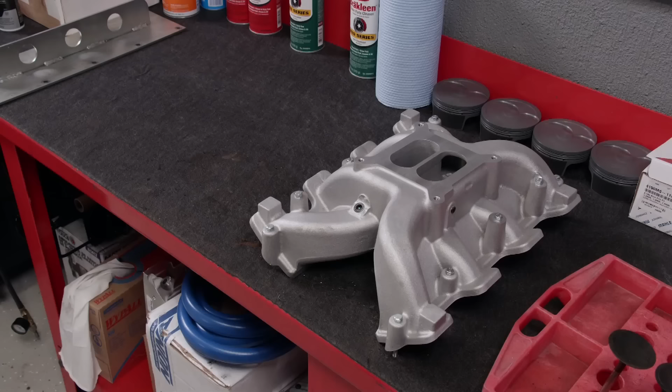Now there's a lot of parts that are available for it, and it's easy to get running out of the box. One question we always get asked is, why don't you dyno the engine with some of the stock parts on it? Well, that's a good point. So today we're going to get this engine running with the minimal amount of parts we have to get it on the dyno. The easiest and cheapest way to get this bullet making steam is to carburate it, so we'll start there.

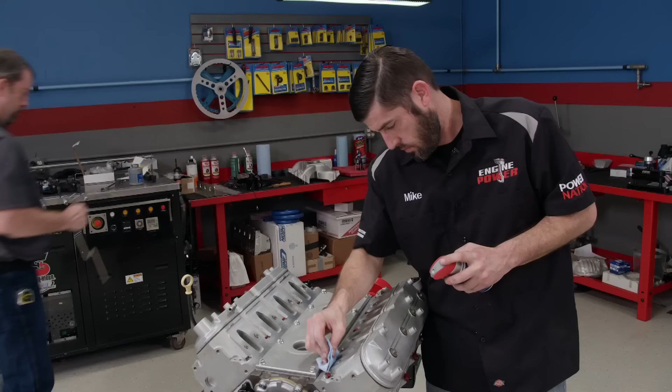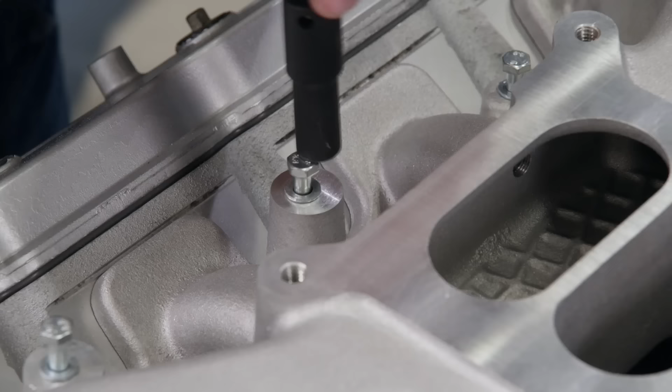WD-40 is used around the intake port so the O-rings in the manifold seal properly. Doing this dry can damage the seals. This is Holley's dual plane manifold for LS1, 2, and 6 engines, which have a cathedral style port. The stock cam sensor is installed, followed by the crankshaft sensor. Next, the OEM coil pack setups go on. This is typically what you would get with a donor engine.

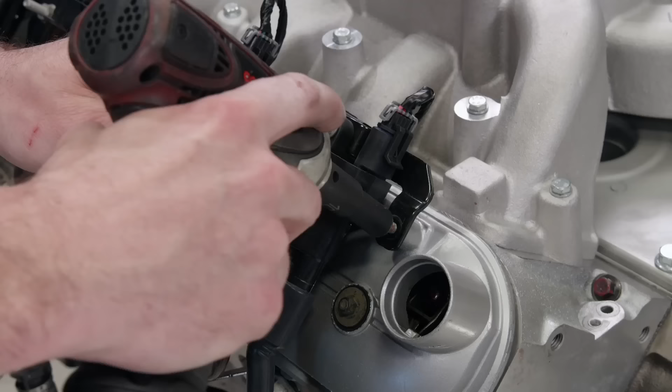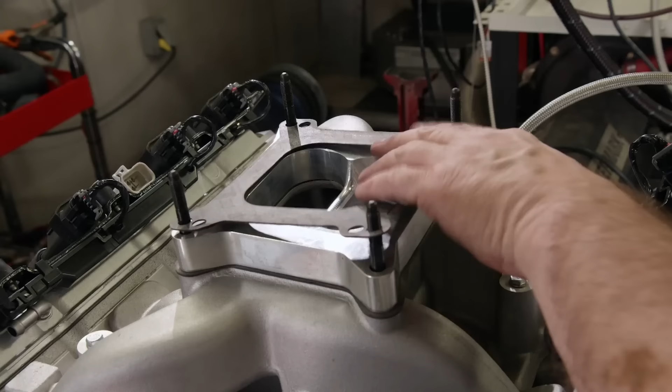With the engine on the dyno stand, it's rolling into the chamber. We'll run it with a 1-inch carb spacer and a trusty little 650 CFM Classic HP from Holley. All right, we're starting this up. We're going to be running it on 93 octane pump gas, and the timing is going to be conservative, 24 degrees total, because we don't know really what's going to happen. So it's going to be run from 3,000 to 6,000 RPM on the pull. Ready? I was born ready.

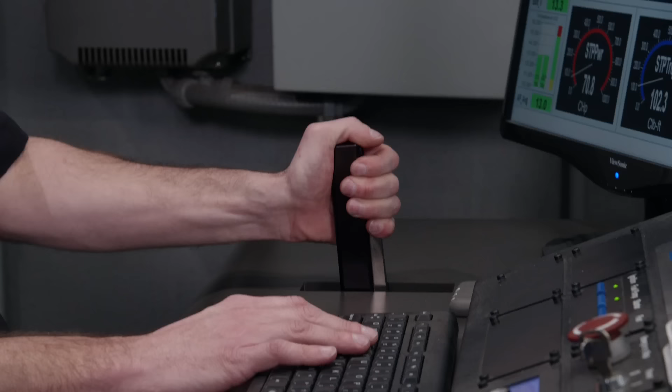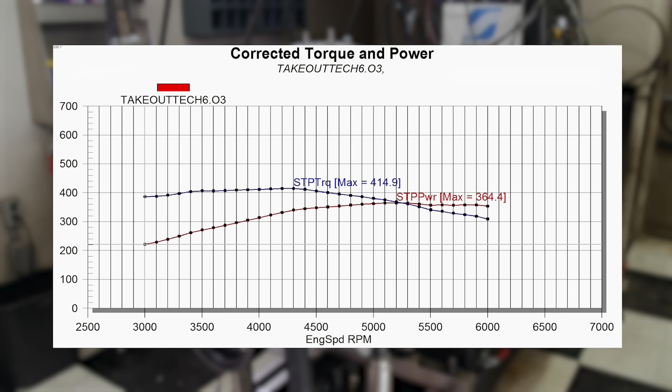That was very smooth, very clean. This thing does have a restriction. A ton of manifold vacuum. Let's go jam that 950 on there. There's a little boost in power. 414 pound-feet of torque, 364 horse. This is literally a donor bone stock LQ4 takeout that we did the absolute minimum. If you were going to put it in a hot rod or something, we stuffed a carburetor on it, a standalone ignition system. And it makes respectable numbers.

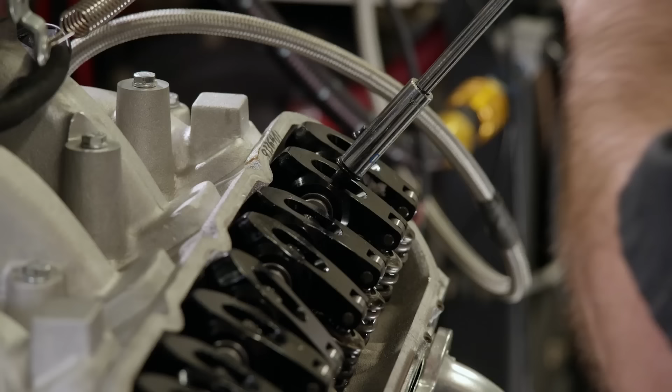The factory rockers do have a needle-bearing fulcrum, but not a roller tip. They are a 1.7 ratio, just like what we're putting on. These Summit rocker arms use their own pedestal stands and alignment bars. They have a full roller tip, and this design will improve the rocker's geometry. So we shall see some decent results. That was a nice looking rocker for the price too. Yeah, it's a Summit rocker, Summit brand. Nice little piece. Everything's the same, timing, whole 9 yards.

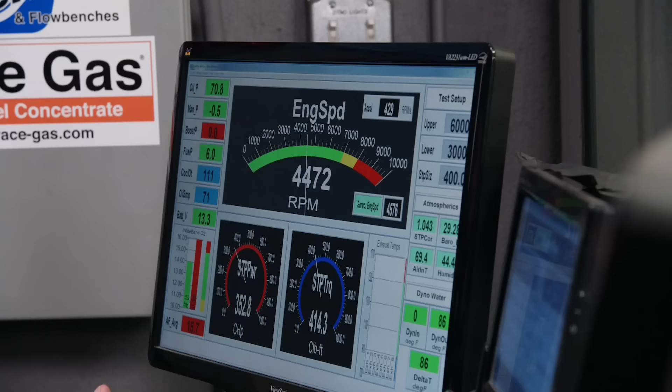Give her the raspberries here. Here we go. Wow. How about them apples? Not too bad. 375 horse, 419 pound-feet. Yeah, that's 9 horse. Nine horse from actually about 20 minutes work.

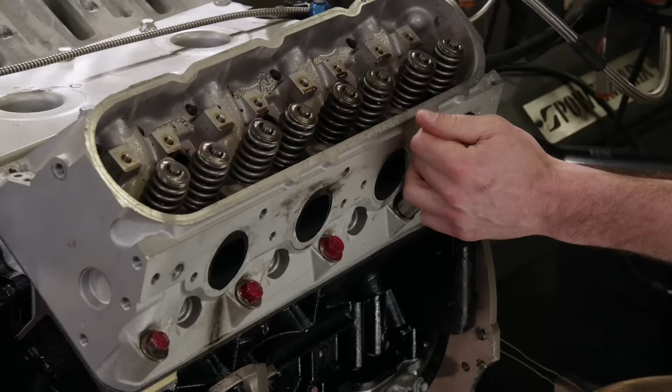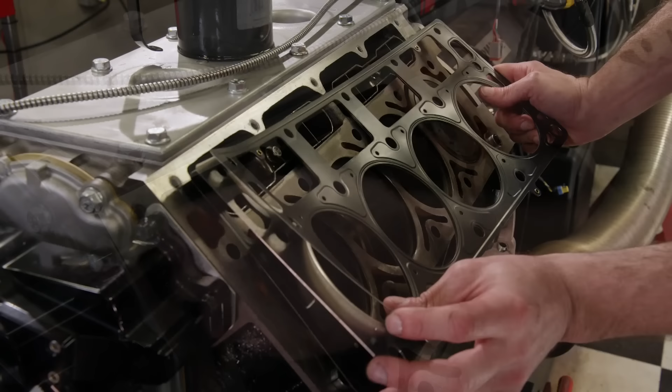Yeah. The stock heads come off along with a 51 thousandths composite head gasket. Since the heads are off, new Trick Flow lifters will go back in the stock trays. Cometic MLS steel head gaskets with a 36 thousandths compressed thickness are placed on the decks. That makes way for one of our favorite bolt-ons, the cylinder heads. Try 3,500 to 6,500. So.

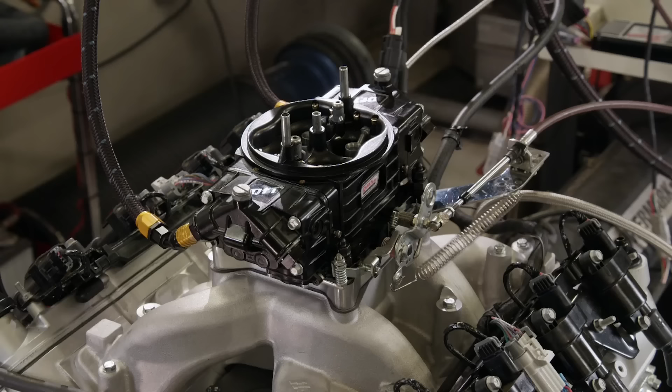416 horse, 440 pound-feet of torque. That's literally with a stock cam, which is a little baby cam. Oh, yeah. So now you know what the next step is. Camshaft. Cam Motion has been making horsepower for 40 years. They're always on the cutting edge of lobe design for street cars all the way up to full-blown race applications.

All right, the only thing we have swapped out is the cam and the timing set, so everything else being the same, we should see a significant increase in power with this. This is gonna be good.

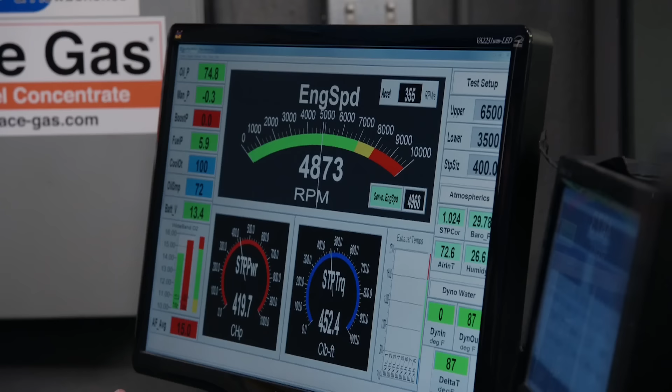That did exactly what it was supposed to do right there. Wow. 511 horse, 454 pound-feet of torque. That is absolutely incredible. This is actually pretty incredible, and as far as engine building is concerned, with just literally bolting stuff on, anybody can do this. Yep. Up next, we've got the real horsepower recipe for the working man's bullet. There you go.

When it comes down to it, we're normal gearheads just like all of you. Now in the shop today, we're going to be assembling an engine that you've either heard or seen a lot about. The 6-liter LS truck short block, known as the LQ4, has proven itself time and time again. These short blocks can be purchased as takeouts for a little less than $1,000 with plenty of life left in them. Or you can find them remanned or in basically new form for a little under $2,000. But either way you go, you have a great platform for reliability and impressive power.

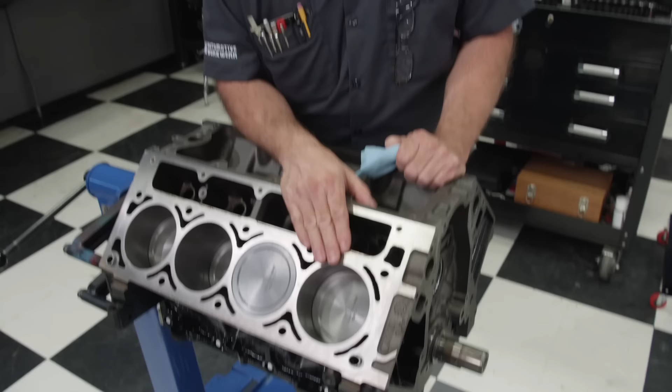The recipe for that impressive power statement Pat mentioned is fairly easy to come up with. We have a stout bottom end from the factory that is ready for a killer induction package. This 6-liter has a 4-inch bore and a 3.622 stroke, which comes out to 364 cubic inches. Now in factory trim, they were rated at 300 horsepower and 360 pound-feet of torque. We're using that reman short block so we don't have to touch the rotating assembly.

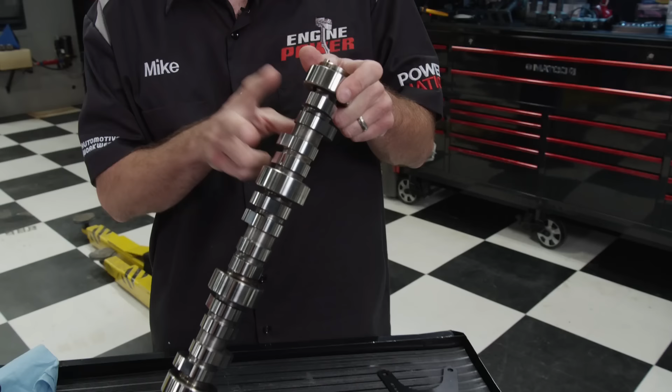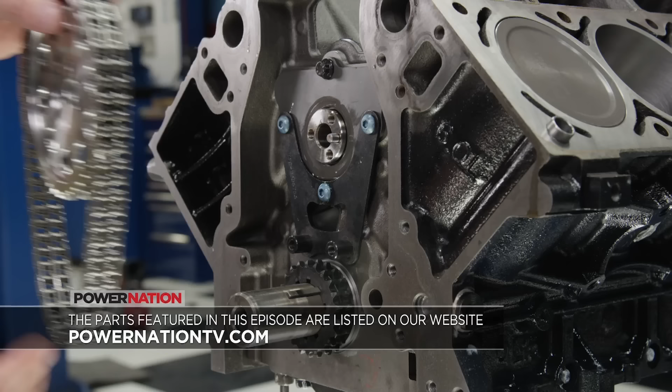Now we're going to start off with the camshaft, which is the brain of the engine, and it affects several different things. It precisely controls when the valves open and close, which directly influences how much power is made and at what RPM. This is a Trick Flow hydraulic roller with a 3,000 to 7,000 RPM range. The timing chain is also from Trick Flow and has 9 keyway positions to help dial in the cam exactly where you want it. Now the oil pump hub is slid on. Since the timing chain is a thicker double row, these spacers are used to position the pump accordingly. With the shims in for proper alignment, the pump is torqued into place.

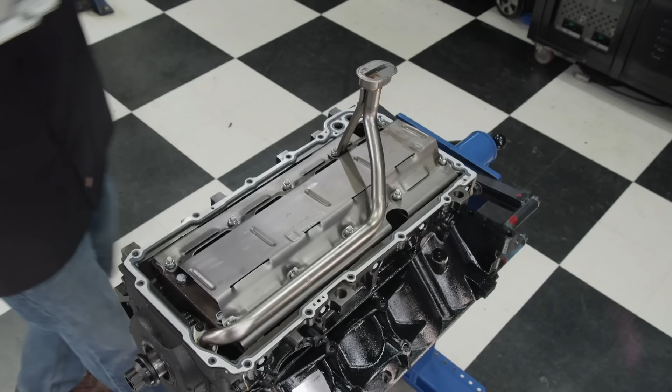We painted the timing cover with VHT Wrinkle Plus for a cool look. Now the stock windage tray is laid in place, and the oil pickup is positioned and tightened down. To cap off the bottom end, the pan is seated on the gasket and snugged down as well. These GenX 255s are known for making great power. Trick Flow did a ton of development work on the ports so you don't have to touch them.

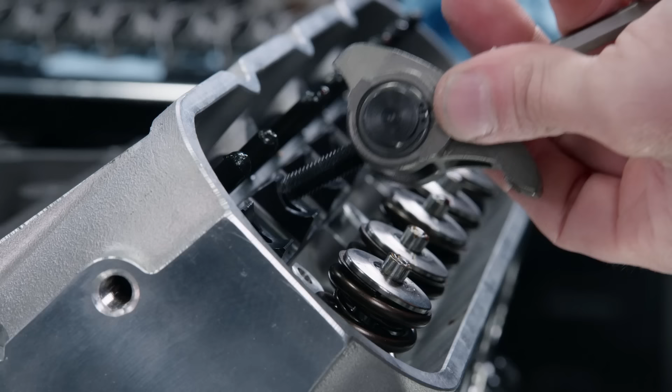Now the push rods can drop in. These are Trick Flow pieces that measure 7.350 and have an 80 thousandths wall thickness. These heads use a TFS rocker stand specific to this head. They require an offset intake rocker and the exhaust rockers are in line. Supplied fasteners will secure them. They're both a factory 1.7 ratio.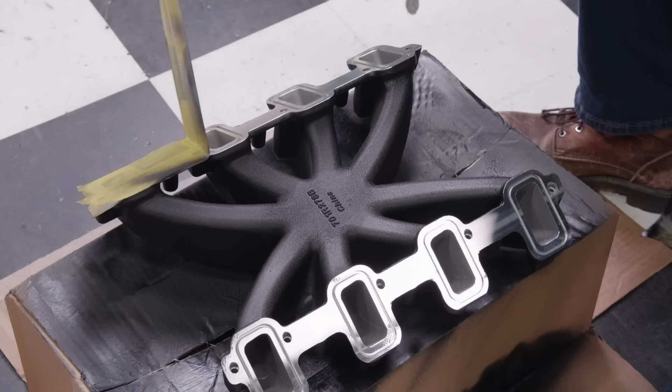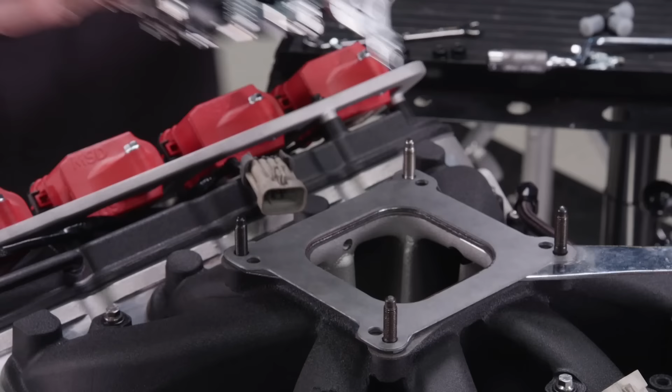This is Holley's mid-rise LS3 carbureted manifold. It has an operating range from 2,500 to 7,000 RPM and a 4150 square bore flange. Up top, our trusty Quick Fuel Technologies Black Diamond 950 CFM 4-barrel carburetor will feed it 93 octane pump gas. This classy looking working man's bullet will be mated to the dyno and ready for completion.

All right, the working man's bullet is all hooked up and ready to run on the dyno. The components we used made for a super simple installation, and heck, we expect some pretty decent power out of this thing. Now we're gonna get it fired up and let it run to break in for about 15 minutes to make sure everything is doing what it's supposed to be doing. And then on to some power pulls.

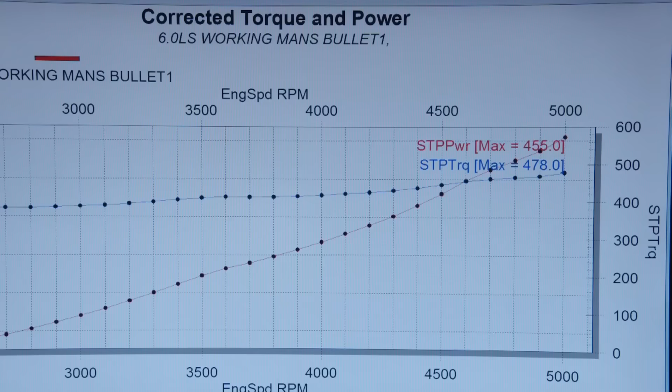Few things run as smooth as a well-built LS. All right. That is not too bad. Well, everything's fine. We haven't found any peaks yet, but 455 at 5,000 and 478 pound-feet of torque. So we'll increase the sweep and go from 3,500 to 6,500 RPM. Ooh, nice and smooth. You made some good power right there. Oh, man. Whoa. 540 horse, 483 pound-feet. This thing has not found peak yet at 65.

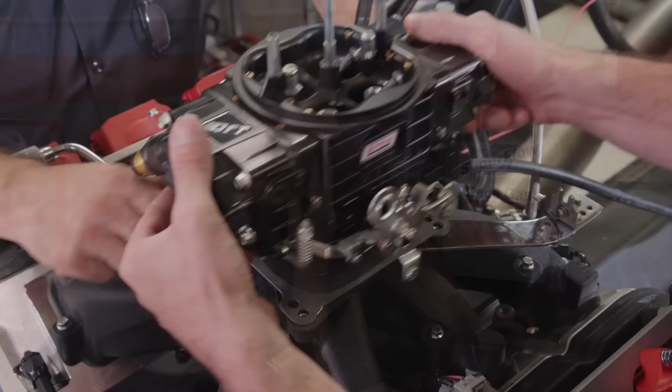We'll drop a 1-inch spacer on to see how it affects our power curve.

And Pat has a theory. It's going to do one of three things. It's going to make more power, less power, or it'll stay the same. I guarantee it'll do one of those three.

All right, here we go. The spacer increases plenum volume and helps the air make a smoother transition into the intake runner. Oh, I don't know. Let's see what she cranked.

The fuel was affected a little bit as far as its air-fuel ratio, but it put it in a nice range. It's got great oil pressure. Boy, how's that for a bolt-together engine? Man, I'll tell you what, this was the working man's bullet. And right now it's making 1.49 horsepower per cube on a bone stock bottom end at a little over 10 to 1. Up next, from the boneyard to big power, we're building power on the cheap.

Now this is a Vortec 5300 LM7 LS engine. It has an iron block, aluminum heads, and it was introduced in 1999. Now this engine is known as the garden variety of the Gen 3s. This engine was pulled out of a Silverado that met its end with a hard front-end collision. Now we were told it was a good runner with no known issues. Instead of just cleaning it up and dropping it in a project, wouldn't you want to know its condition, especially if you wanted to run efficiently for any amount of time?

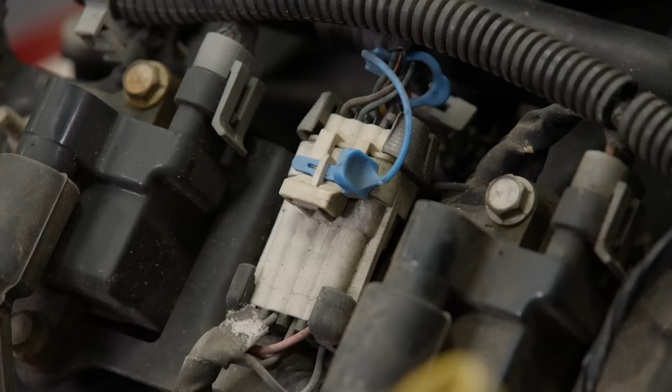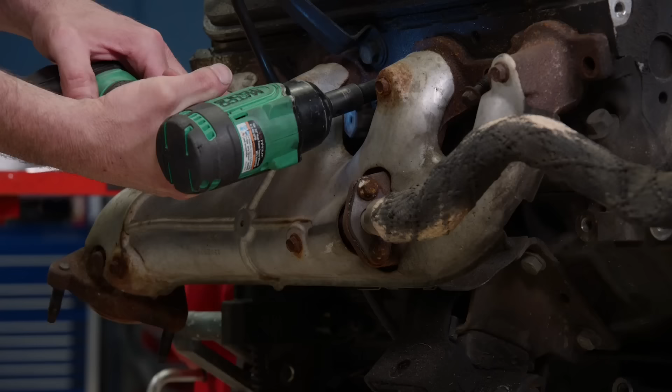This project is getting the badge name Low Buck Vortec, and it's for good reason. We're going to tear this engine down, thoroughly clean all the parts, do some block upgrades, and spice up the oiling system, including the oil pump. Then the entire engine is going back together with minimal new parts. When this engine was pulled, pretty much everything was left intact. We won't need several parts and pieces like the wiring harness, so it will go first. The exhaust manifolds are cast iron. We will be using a set of dyno headers later, so these go in the scrap bin.

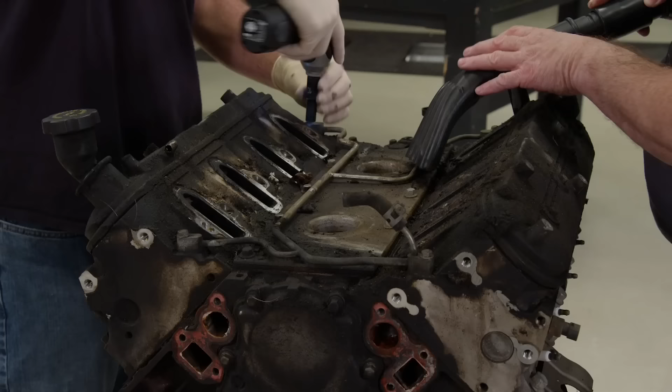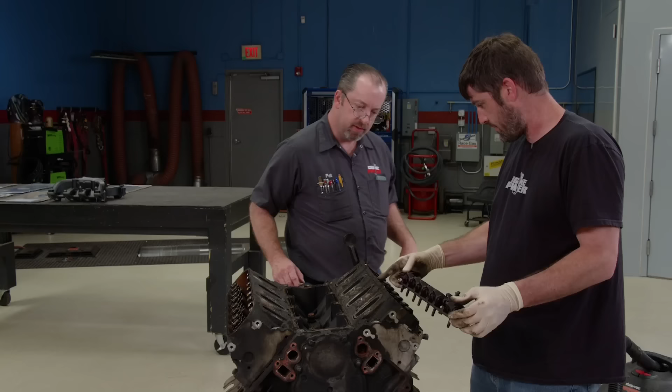There is some truth to the saying, it's all in the pan. Well, for as many miles as they say it's on it. Typical LS pan. Any high mileage, well-used engine is gonna be a little dirty. You can never really tell what's going on until you tear into it. Man, see the corrosion down in here? And that one looks brand new. Okay, this is the exact reason why you tear an engine apart very slowly and look at everything, because this will tell you that you have an issue. It's crucial to label parts as you're disassembling any engine.

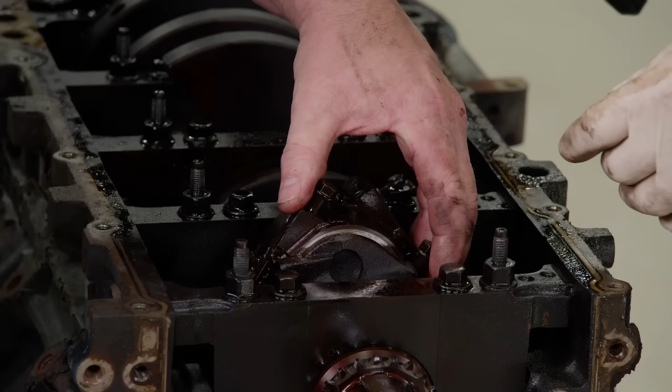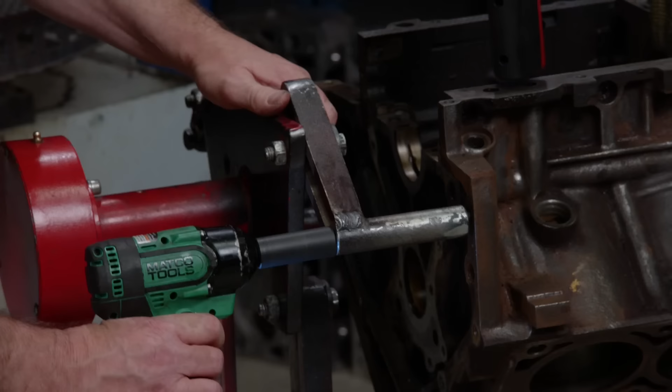This is what I'm very interested in seeing. Yes, this is the go-to moment. Dude, look at that! What the heck? High mileage LS and the bearings look new. Wow! A thorough cleaning in the jet washer will knock off years worth of grime. We'll give the engine another pass in the jet washer and begin assembly. One of the few new parts we're installing on this engine is a set of main bearings.

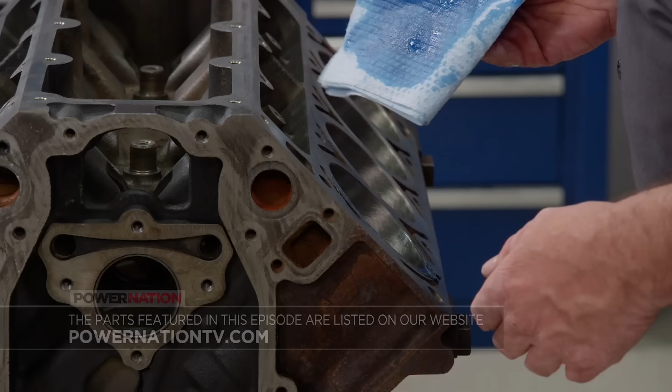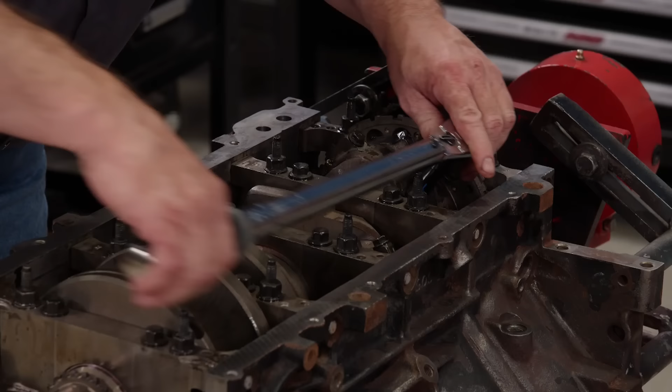Before installing the rod and piston assemblies, lube the cylinders with break-in oil. We'll also lube the wrist pins as well as the rings. Using a ring compressor, they are gently tapped into place. The fasteners are torqued to 15 pound-feet, then 85 degrees on our Matco half-inch drive digital torque and angle meter. We replaced the stock cam with a CamMotion LS1 Stage 3 hydraulic roller. This is a mild performance cam that still works with stock components.

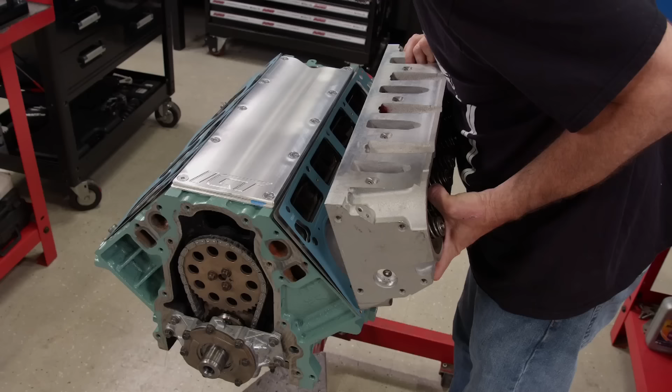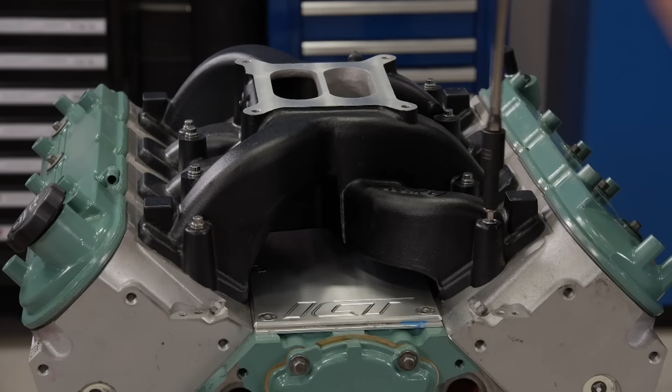The cylinder heads were installed with new stock torque-to-yield fasteners and torqued to 22 pound-feet initially. Then we used a torque angle meter to tighten the fasteners 2 rounds of 90 degrees. Finishing out the build is the valve train, oil pan, and one more aftermarket piece, a Holley dual plane intake manifold. We're almost ready to fire up the Vortec, but first we need to install some electronic components. First is the coolant temperature sensor, followed by the cam sensor.

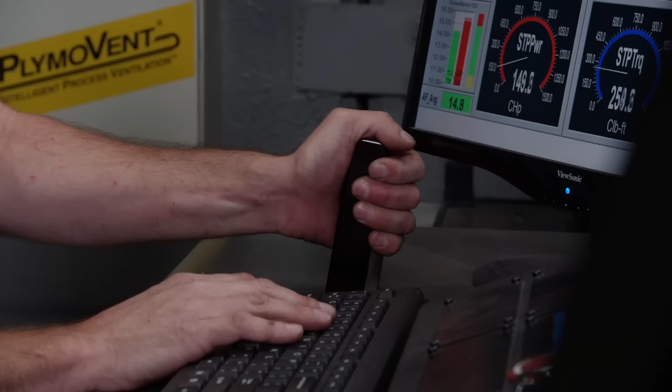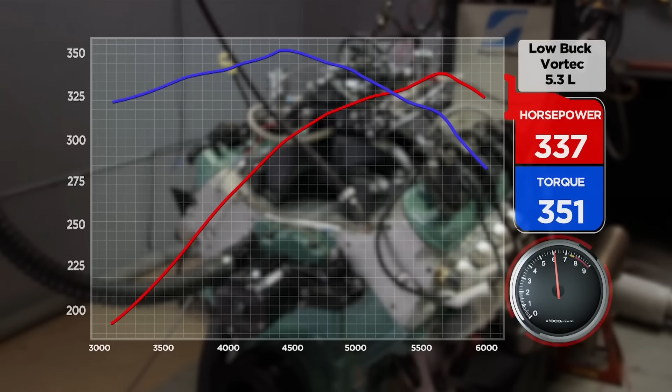All right, on our budget extravaganza here, this engine requires 0 break-in. So go from 3 to 6 and make a hit. Here we go. Look at that. That is used rings, used rod bearings, used rod bolts, 337 horse. 351 pound-feet of torque. So now here's the thing. We did this to show everybody how they could get a junkyard engine, do a little tech to it, and put a power adder on it.

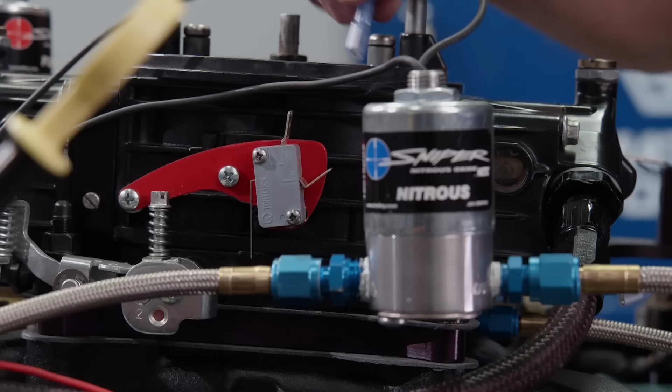Right. Again, I guess the power adder is nitrous, and you know how I am a naturally aspirated guy. This is a good way to do it, though. It really is, because this is the cheapest you can do it to make the most power you can, bang for the buck. So stick that plate on. Let's do it. We're running a Holley Sniper nitrous system, which has a range of 150 to 250 horsepower, depending on the size of the jet. I'm arming it. All right, are we ready? Here we go. All right.

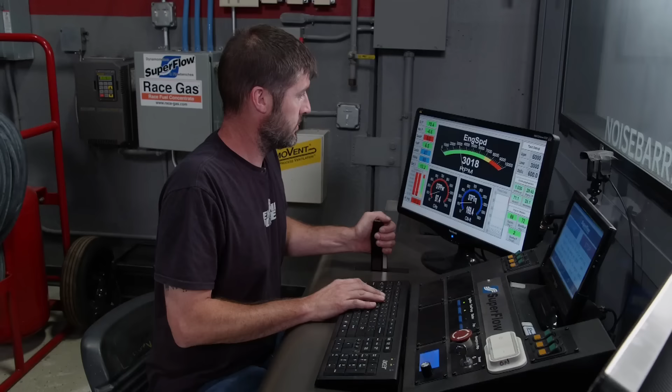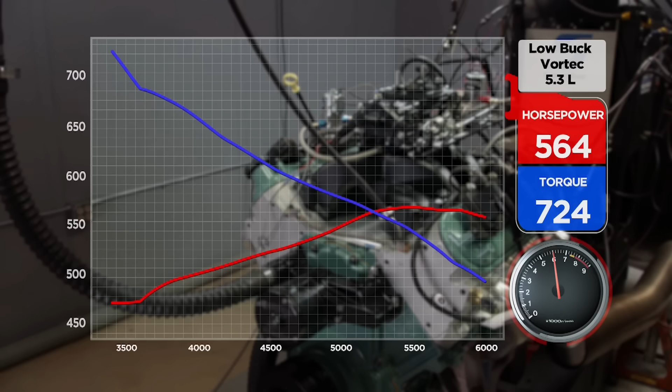Holy crap! Oh. 724 pound-feet of torque, 564 horsepower for 150 shot. So on our 150,000 mile, we reused pretty much everything engine. I think we flirted with disaster right there, but we won. We won it. This time we won. All right. Nice. Nice job.

Nice, nice. Up next, it's time to get wicked and wild with our test sled build. Kenny, this is awesome. We are getting ready to experience one heck of a ride. Around 1,300 horsepower and a finished weight of just under 2,000 pounds makes for one wicked power to weight ratio. And we've been getting some things ready for the engine build, so now it's time to get dyno ready.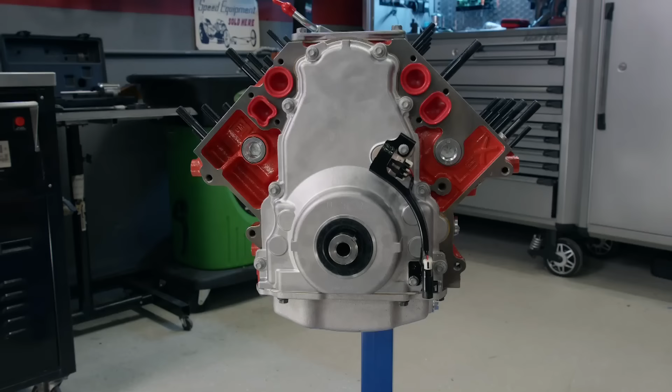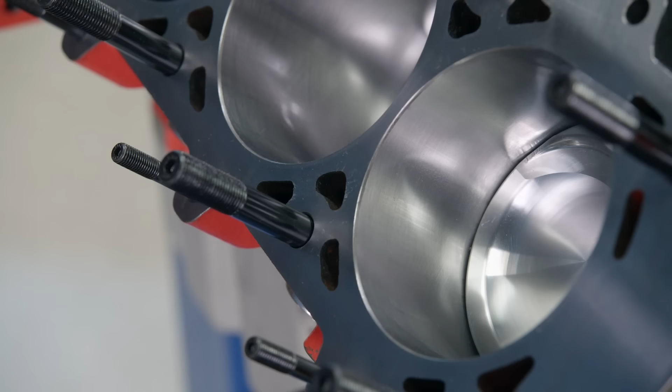This is LME's highly proven 2,000 horsepower capable LSX Extreme Crate engine. This one has a 58X reluctor wheel, a wet sump oiling system, and you can order this engine with a 9.5 to a 10.5 to 1 compression ratio. Just specify what you need. The heads are LME's custom LS7 6-bolt CNC ported design. Victory DLC coated 2250 titanium intake valves and 1600 Inconel exhaust valves were spec'd for our application.

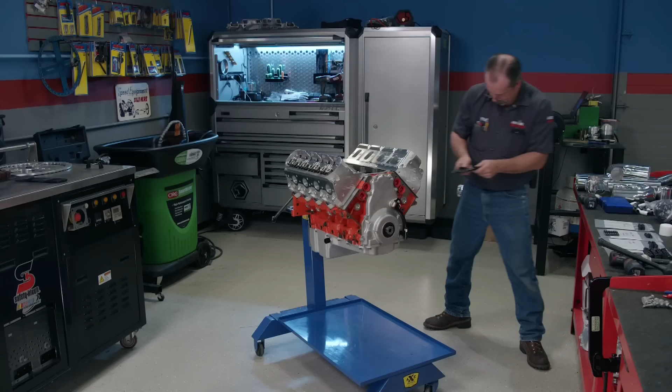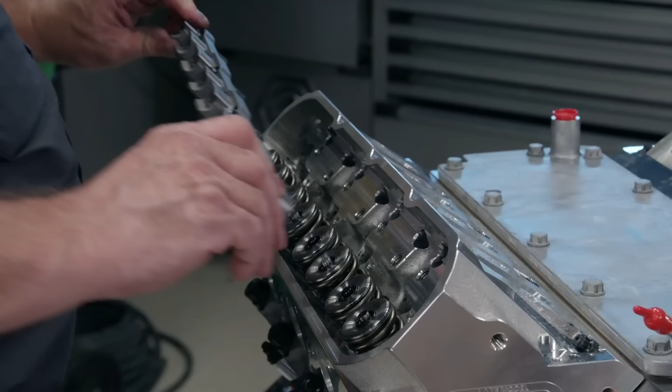PSI DR424 dual valve springs are good to 800 thousandths lift. They use titanium retainers and machine locks. The heads are located on the smaller ARP outer studs, and then massive ARP half-inch head studs are torqued in sequence to 120 pound-feet using ARP's Ultra Torque Lube. The stand is bolted to the head and torqued to 45 pound-feet.

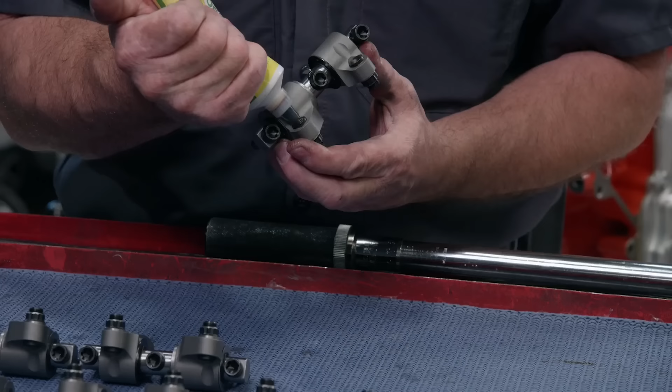Heavy-duty Manley 3/8 diameter push rods with a 135 thousandths wall handle the valve lifting duties. Stability and durability are important in the valve train. LME sent us this Crower shaft rocker setup that utilizes stainless steel bodies with roller tips and trunnions. The LME valve covers are machined in-house from a block of billet.

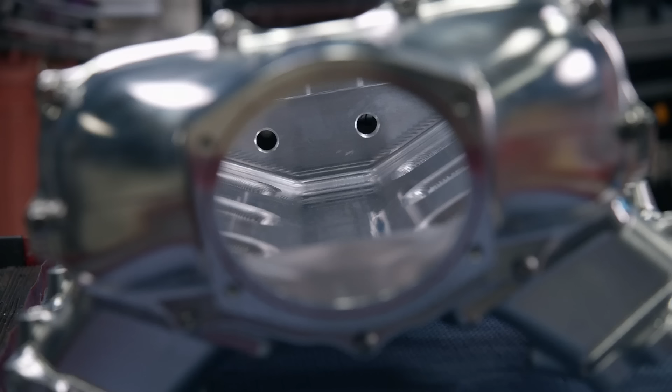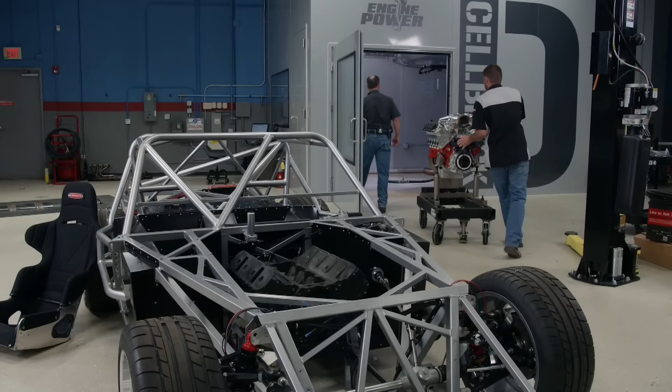Another block of billet is carved into LME's signature LS7 intake. The intake is designed and built entirely by LME. With a touch of light oil on the O-rings, the manifold is installed. Finishing off the assembly is an ATI Superdamper. Now we can roll this 427-inch LME Race Crate Extreme LS engine into the cell.

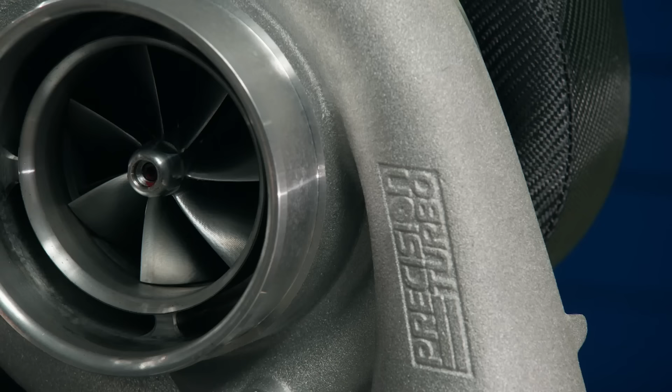The turbo is a Precision 8685 Gen 2 with Sportsman V-bands on the inlet and outlet. The 86mm compressor wheel is machined from a 2618 aluminum forging. This turbo has a 1,500 horsepower rating and is perfect for the street or the strip.

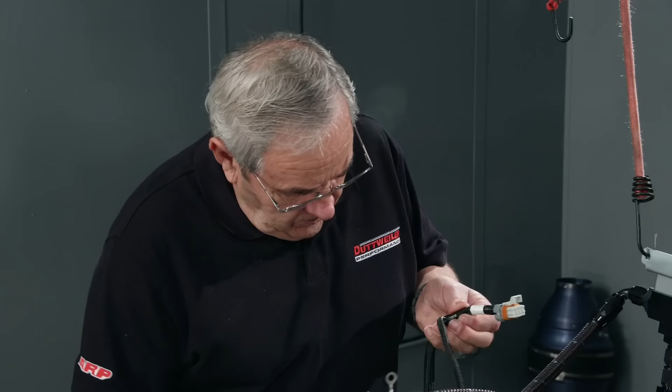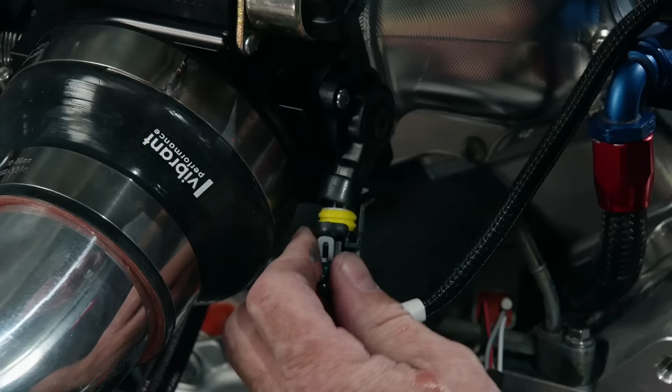Kenny Duttweiler is more than just a turbo guru. He is a pioneer in the performance turbocharging industry. From setting records at the Bonneville Salt Flats to having his engines burn up the streets and tracks during drag week, Kenny is someone everyone looks up to and trusts due to the innovation and durability of his work. We're going for big horsepower, and Kenny is the guy to have here.

In 1981, Kenny built his first turbo system for an underpowered stock truck. The GMC dealer had a whole bunch of half tons. They were all 6 cylinders. Well, I would really prefer to have a 350 V8, but I needed a truck, so I took the 6-cylinder and promptly turbocharged it.

Well, this is the moment we've all been waiting for. We got Kenny at the controls on the computer, we got Mike on the dyno controls, and I'm just here for moral support. The engine has been fired up, I have set the valve lash, and we are ready to rock, so we're gonna make a baseline pull to see where we are. And Kenny, this is a safe tune, so we're gonna make a pull and see what happens. Absolutely, yeah, it'll only get better from here. Okay.

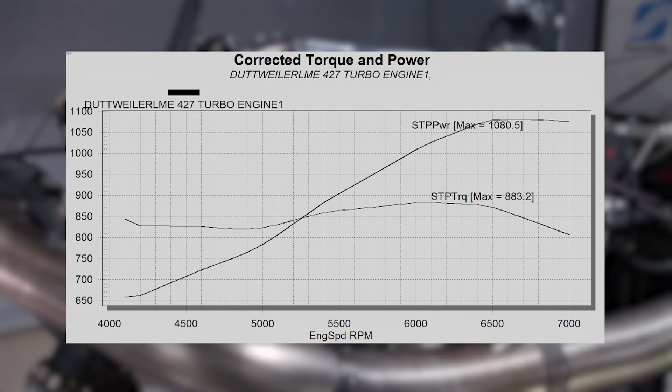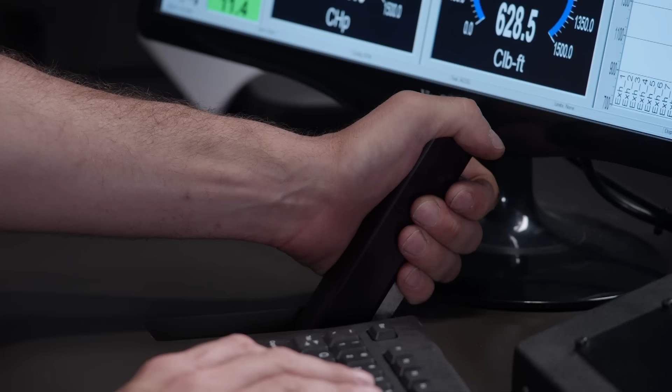She did it. Our boost picked back up too. Yep. 1,210 horse, almost 993 foot-pounds of torque too. Oh my goodness gracious. Yes. That thing made 993 at 6,200 and our power, look how nice it levels off. Oh my goodness, that's beautiful. 1202, 1206, 1206, 1208, 1210, 1207, all up to 7,000. It's a good wide, over the top deal, isn't it? Yes. Great job, Kenny. Nice job, man.

Awesome. We hope you enjoyed these builds as much as we did.